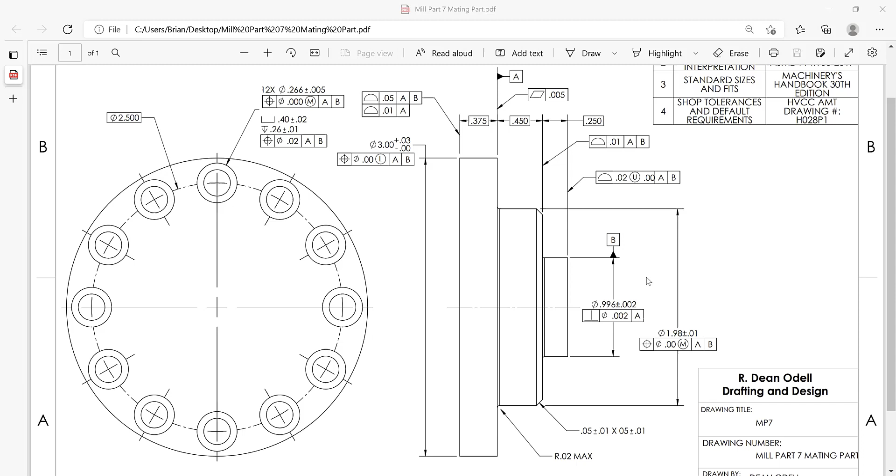Alright, this is the part we're going to be working on for this module. So we're going to do the turning on this side in this op. We're going to flip it. We would bore soft jaws at the machine. We won't program that in Mastercam.

We can do G71, or we can use one of the Haas quick codes to do that. So we'll leave that alone, but we would grab it with soft jaws on this diameter, flip it, and then we'll face the remaining stock, and then we'll use the live tooling to drill and circle mill these holes out. So that's the process plan for this one.

So let's get started. Alright, so let's import this model. So I'm just going to go to open here and go to my desktop. I already have it downloaded. I'm looking for step files. Make sure if it's not there, you're looking for the right file type. So there it is. Hit open. And there's our workpiece. So notice it's not aligned to the top plane correctly.

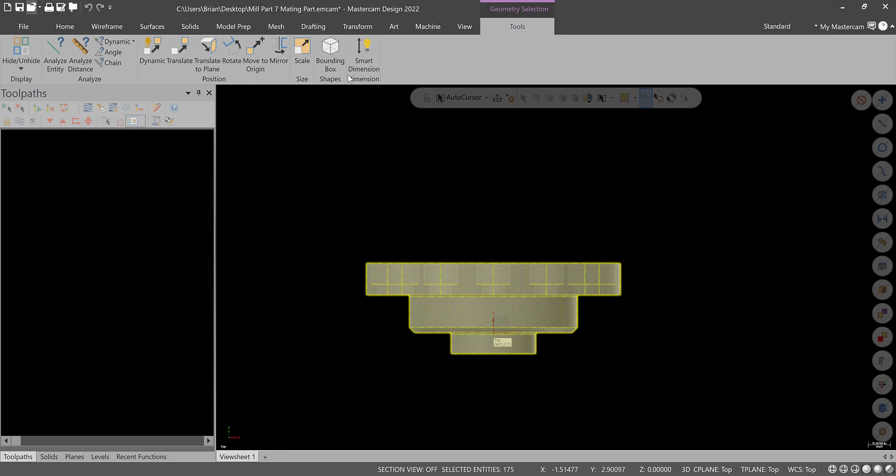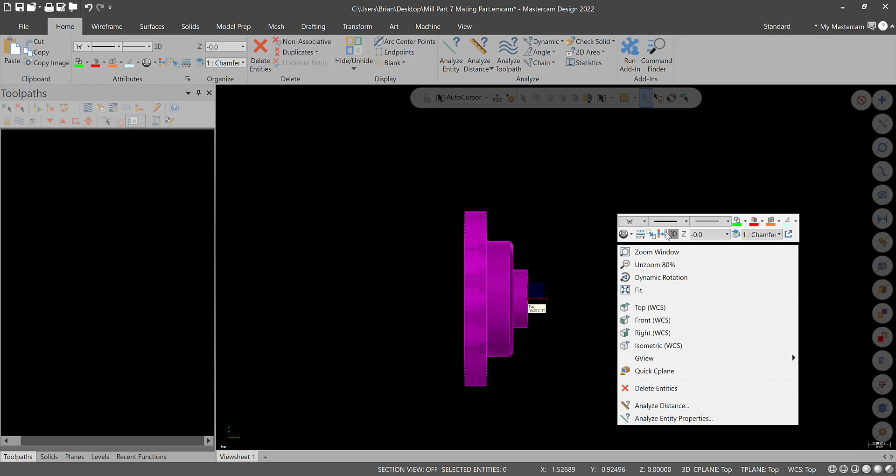Okay, so we go to top view, it's not right. We need to translate it. We could have done that in the initial open screen, but I find it just as easy to just move it here. So select everything, dynamic, and I'm going to select the diameter here, rotate the workpiece -90 or 90, like that, and then select the center of the dynamic gnomon and bring it to the top plane. So then if we go green check and top view, it is aligned properly to the coordinate system of top.

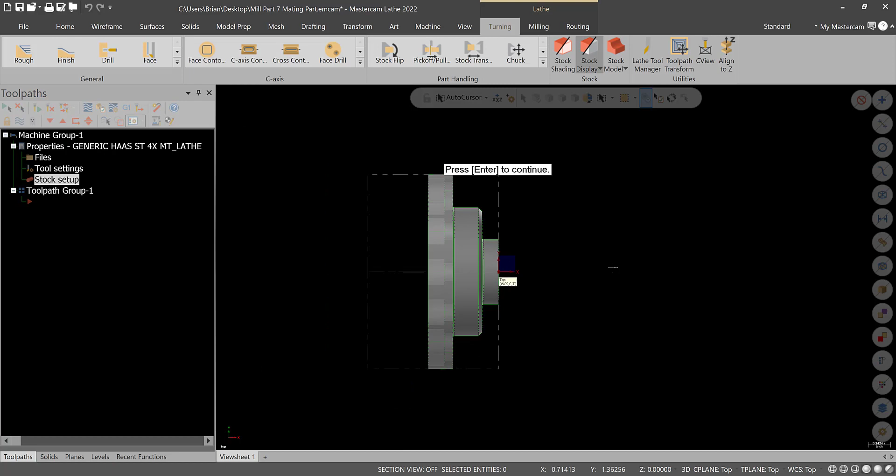So we're good there. Let's go to a new machine, machine, lathe, the generic Haas ST, and let's define our stock. So we'll go into our stock settings. We're going to be using 3-inch stock for this, probably, let's say 2-inch for workpiece for now. Let's preview lathe boundaries. That'll work for us. Then beyond that, we're good here. In the chuck jaws, we'll go parameters here from stock, grip length, let's say 1 inch, and let's see where that gets us. Alright, a little less than that we'll need, so let's go 0.5.

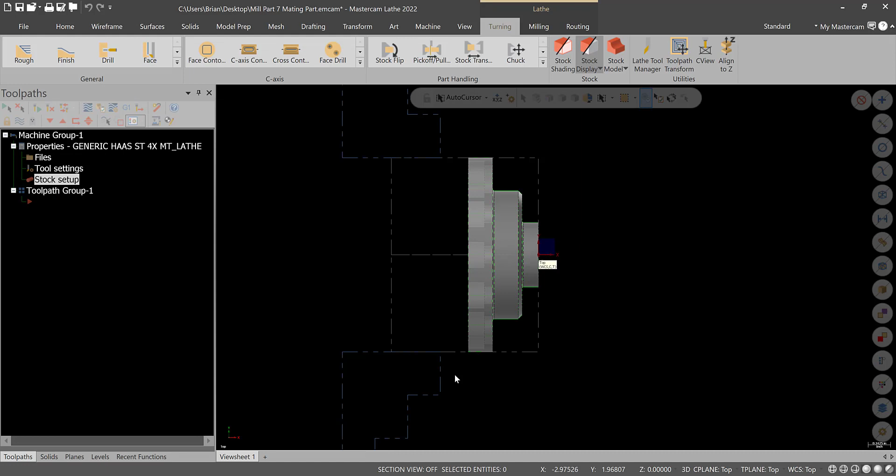So that looks good. One thing I might change, we are going to go right to the edge here. I might actually extend the stock. So if we go to stock, let's make this length 2.25. And then if we go to chuck jaws, we can change the grip length to something like 0.75. And that's better. I'm happy with that. I think it's a safer setup. Okay, I know it's kind of a lot of stock. We do have some stock here that we're going to have to take care of later. There are other ways to do this, but I think this is the quickest operation for us.

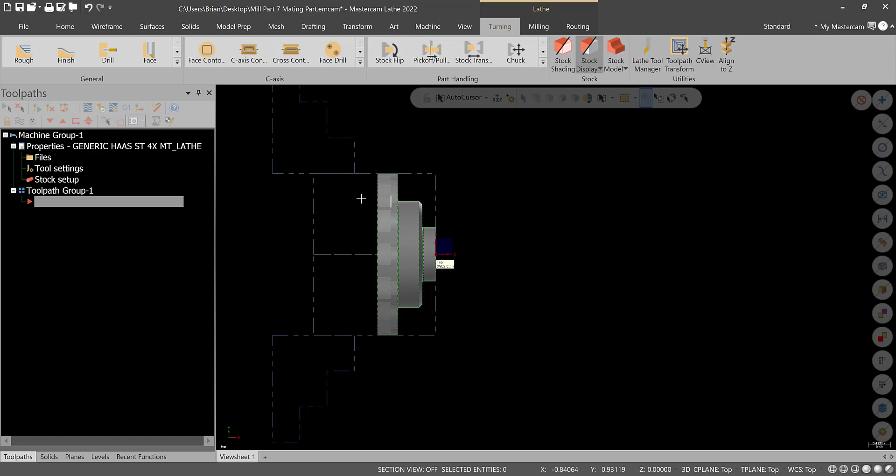We're not going to part this off. We could actually grab closer, but I want to keep students away from the chuck jaws. I'd rather leave clearance here and not hit the jaws than hit the jaws and try to save a little bit of stock. So that's my theory there. In reality, if we're making these parts for profit at a machine shop, we would leave less material, in my opinion. So toolpath group 1, we'll just call this turning op, or just op 1 for now. And let's face this workpiece.

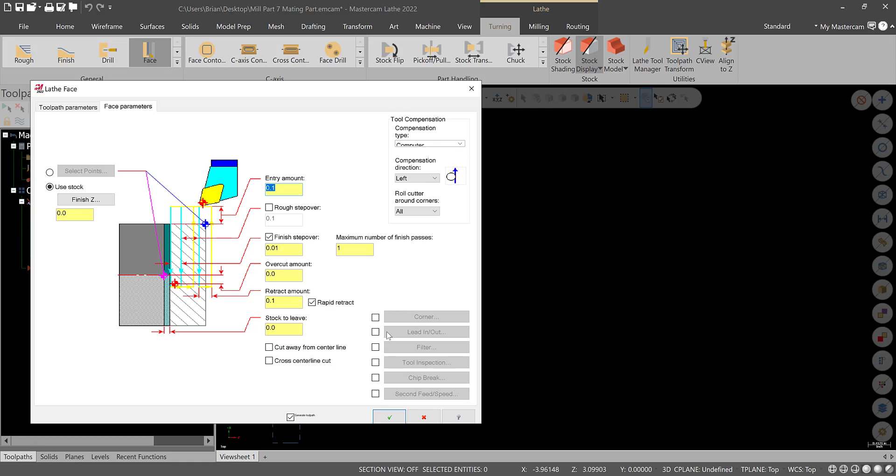Good time to save. I'm just going to save this on my desktop as live tooling example. And then I'll transition here, allow you to catch up, and we'll go back and we'll turn this, and we might turn this with a little different method than we have in the past.

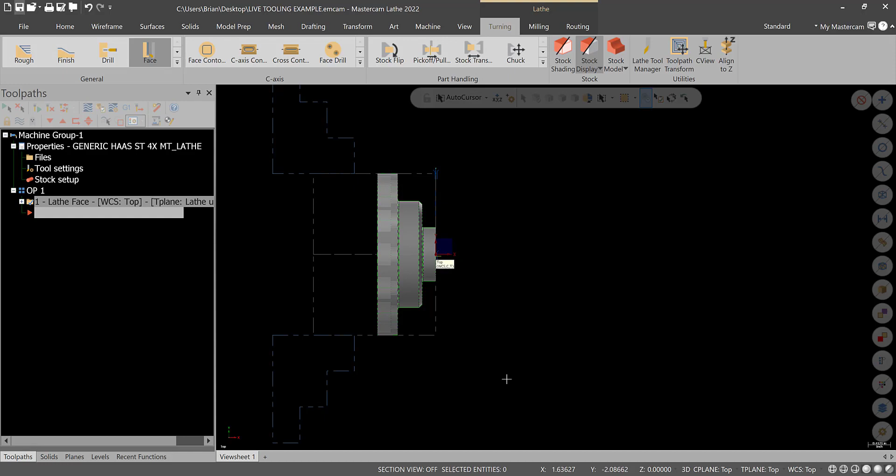Alright, so let's take care of deburring this part first. We have a couple of sharp corners I want to take care of. And like I had done in previous modules, I'm just going to go into solids and constant fillet. We'll select that corner and that corner. And the radius will be 15 thousandths for us. That's usually pretty good. Green check. So now we have those filleted.

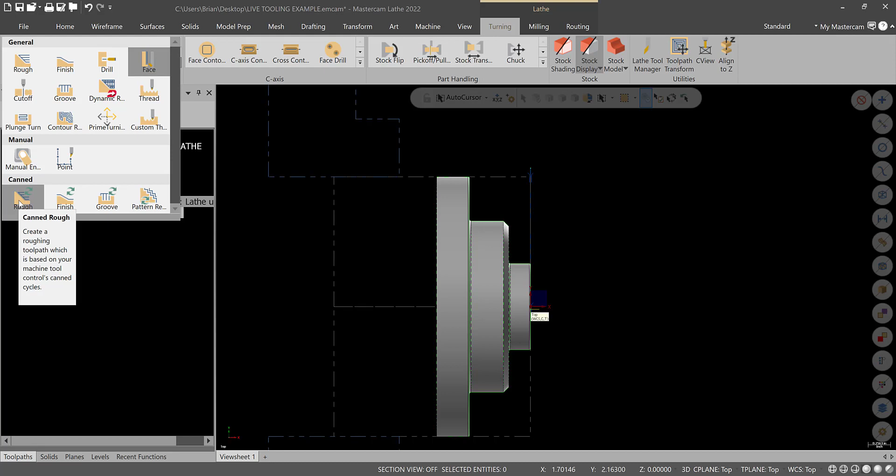So now we can get ready to turn this. So just to do something a little different, we'll go to turning, and instead of doing the regular rough or finish, we'll actually post this out in canned cycles. So let's do a canned roughing cycle. This would be outputting G71. So we'll go to canned cycle.

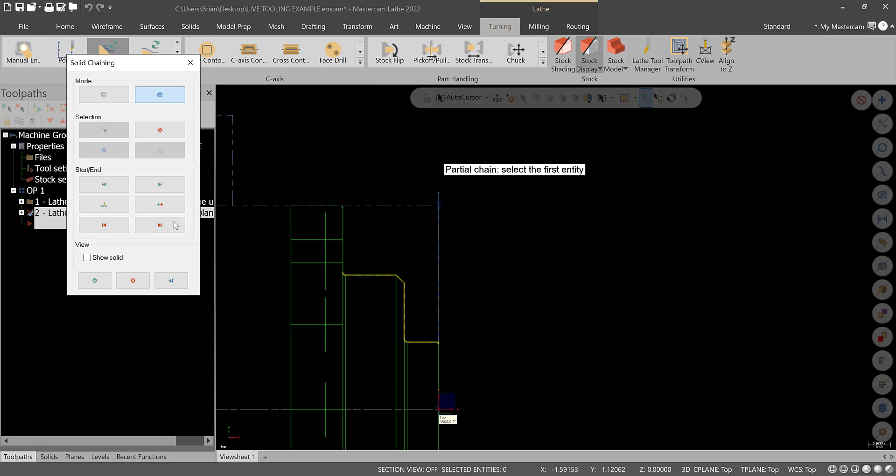We'll select the radius, the fillet here, change direction, and then select the end here, and it should select. If it does not, I'll usually just get out of here, go back to this one, and guide it with the arrows, just like that, and we'll hit green check. Use the same tool that we faced with. Same speeds and feeds will be okay. Again, it's reduced, but it's fine.

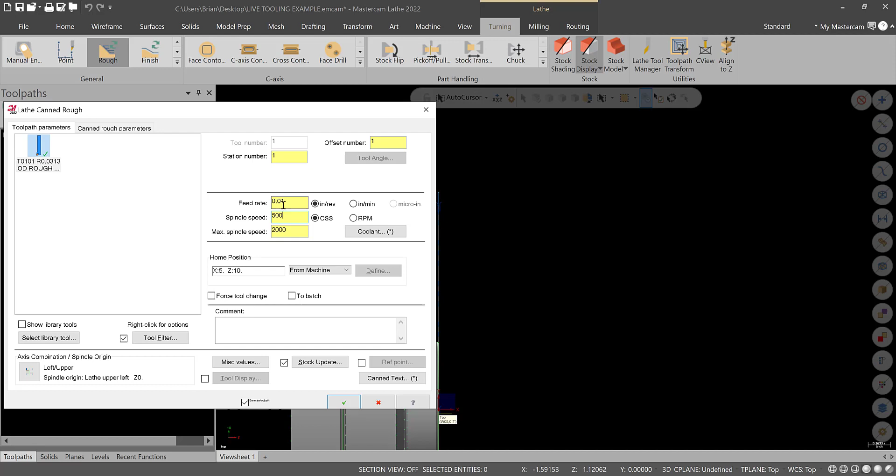I'm not sure how much experience people are going to have running this. From a programming standpoint, it's sort of irrelevant. If you're just programming, you're not going to be running this in the shop. But I'd rather be a little conservative with speeds and feeds for people running in an educational environment. So canned rough settings, stock to leave in Z and X 10 thou is fine. Depth of cut will go 0.050.

Everything else looks okay. The only thing I want to change is going to be lead in, lead out. I want to extend the lead out a little bit, let's say 0.030, just to make sure that it cleans up later. Shouldn't make a huge difference. We will radius out. I just don't want to leave any radius there or anything like that. So that's good. Everything here looks okay, but notice it prompts us for a 2-line format.

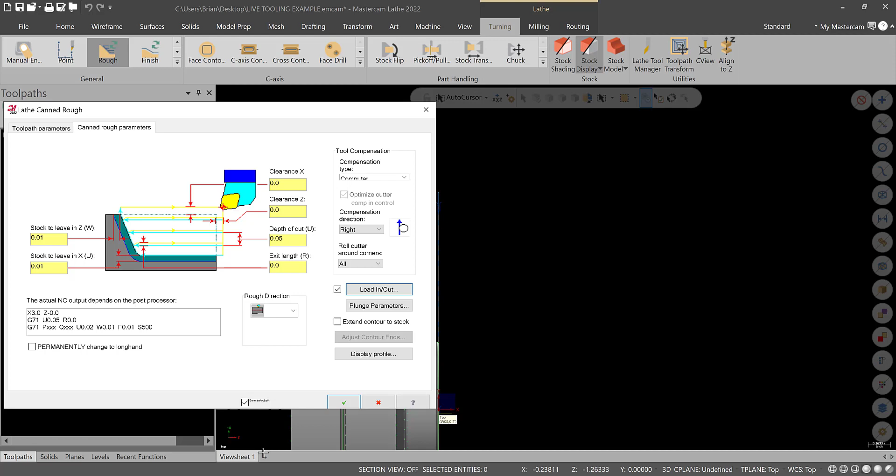G71. The Haas is probably going to output a 1. I gotta remember that, but anyway, that's what's gonna happen. You could change it to longhand, but this is the output G71, which is great if somebody's gonna be changing this program later on. It's just another way to do it. So hit OK. There's our roughing cycle, so we could actually watch both of these right now in backplot. So here's our facing.

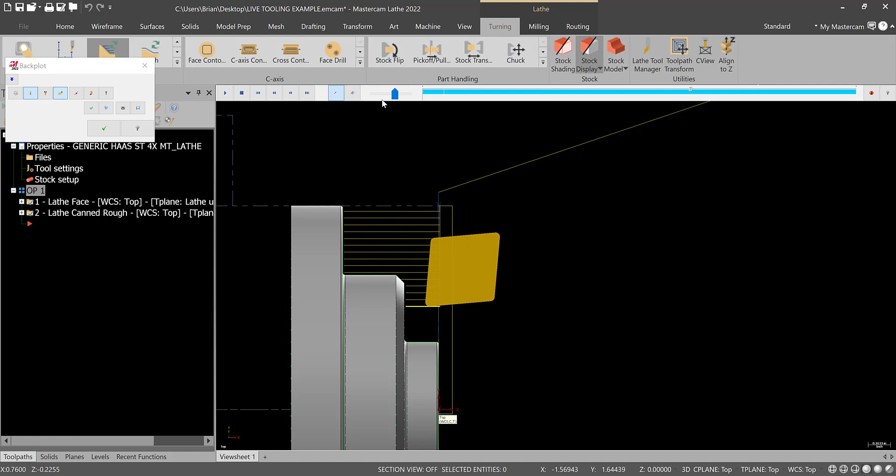Okay. Now, in theory, we could have left no material and that would have finished the workpiece, but we'll do a finish just to have the G70 be put in our code. The other thing I want to bring up is that I know that the part is 3 inches and does have a plus tolerance on it, but the stock we're going to use for this in the shop is 3 inch, so I will either change the tolerance of that or we'll just live with it.

I don't want to end up going to 3 1/4 or 3 1/8 because 3 inches is the standard stock size we have at the college, so that's what we're going to live with for this. That's why it is the way it is. So there's a roughing pass. Okay, so let's just take a look at this right now. We'll post this canned rough alone just to make it simple to look at.

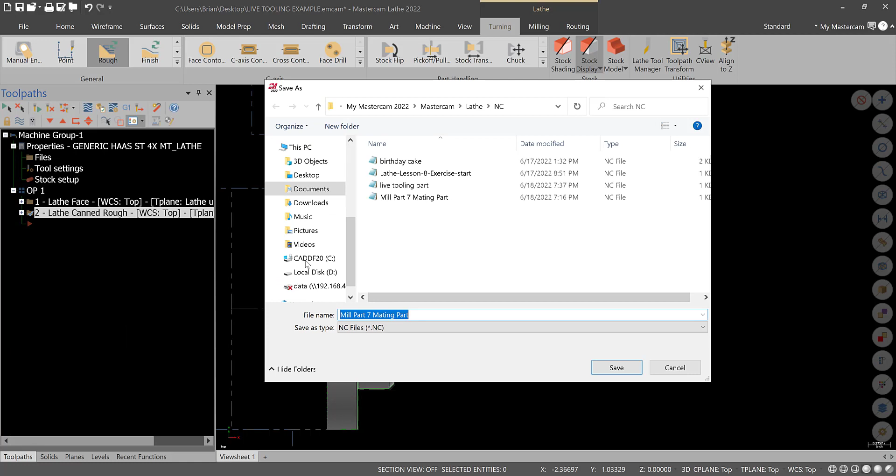And you will see your 2-line G71. P100, and it posts it right out like you have done in the past doing this longhand. So that's another way to output the code. It's shorter, it's easier to edit, but for right now, I'll transition here. We'll take care of the finishing passes. Alright, so back into Mastercam here. Let's just do a finish operation.

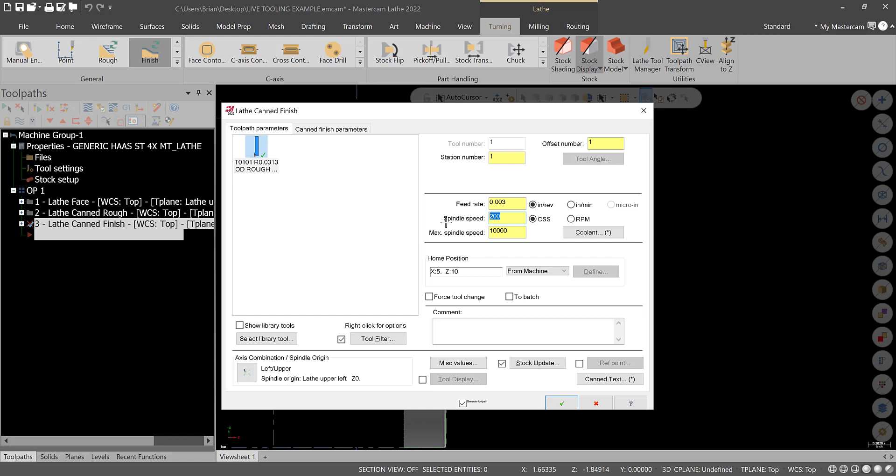Now the nice thing about canned finish is that there's no chain selection, so I'll turn the visualization of the roughing off. Let's go to finish, and notice the same tool popped up. We'll rough and finish with the same cutter. Let's update the speeds and feeds a little bit. And then look at the parameters, nothing much here. So let's hit green check, and this is going to look okay.

We'll look at the code, but then we're going to have to come back and fix it in a minute, and I'll show you why this is here. So hit green check. And notice this leads in right here, and if you look, it's leaving a little bit of stock. So that's okay. If we verify this, it is not the end of the world, but because the initial pass,

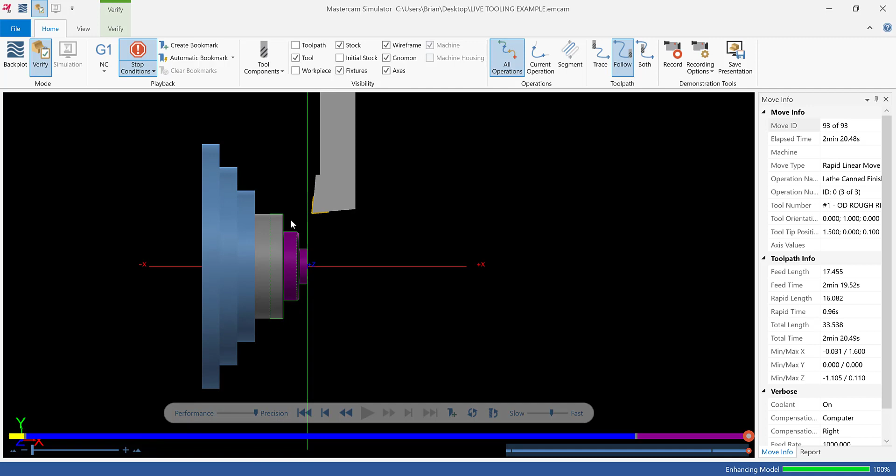there it is, there's a finish. So you see, it's not quite cleaning up the radius how we want it to, versus this radius. But what I want to show you, and again, that could be okay, it's only deburring. It depends on what you want, and there are other ways around that, but let's take a look at these two operations in code, just to show you this.

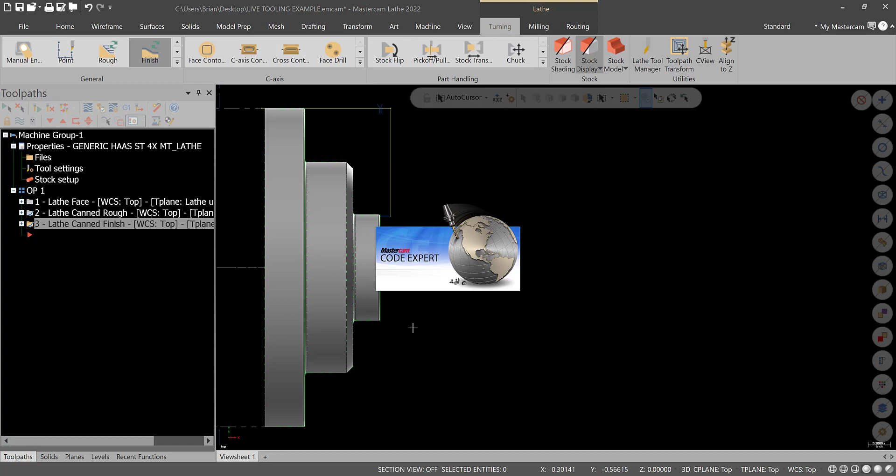Alright, there's our G71, our lines of code for it. Okay, all the way to 110. Z1.0, then go to G70, which will loop back to here, and there's your feed rate changes for the finish pass in here. Alright, and that's it. So there's G70, G71.

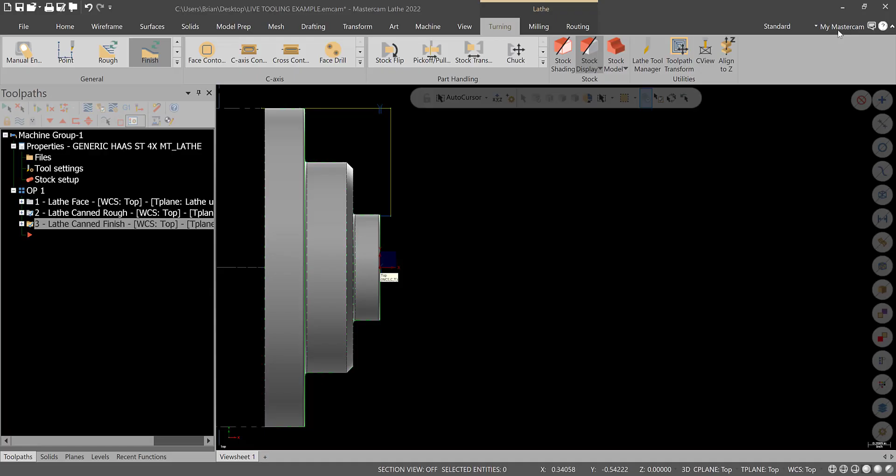Now, there are some options here, but I want to show you what would happen, why that permanently changes there. Notice, this is a problem, let's say. We don't want this. The canned parameters in the rough won't allow that for whatever reason. If you click this, and this is why it's here, click this and hit green check, it goes into a regular finish toolpath, and now look where it is.

Okay, notice it verifies right. It turns it into a standard finish toolpath, not G70, without having to go back and rechain it, which is kind of handy. It's also in the roughing, so if for whatever reason you don't like it, you can go back and not have to reselect. It's sort of handy.

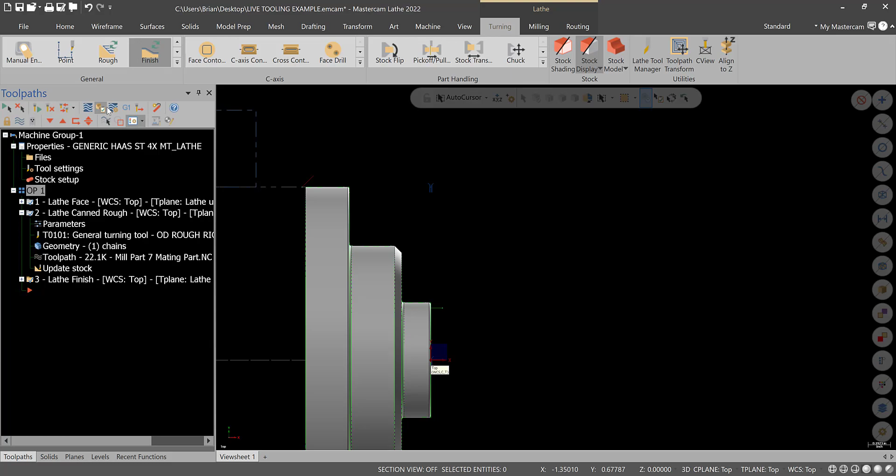So now if we select both of these and post the code, and actually before I do that, let's verify everything just to show you the difference. Face, rough turn, canned, and then finish turn, and notice it's a full radius. Okay, so we're good there. Let's post only the OD work. Take a look at the code differences.

Alright, so we got our G71 going through, right through line 110, changes, and there's our longhand finishing, right there. Okay? So it's a little different. You know, it works good. Let's double check our G50, S2000, that's good. The only thing that I'm not a fan of is the G97 right there. That should turn the spindle to S2000.

It's not the end of the world, but it could speed up or slow down depending on where we're at and what the constant surface speed works out to. But I'm cool with this. Being that it's one tool, the G50 is a limiter, we're good to go. We'll live with it. But yeah, so that's essentially what happens with that.

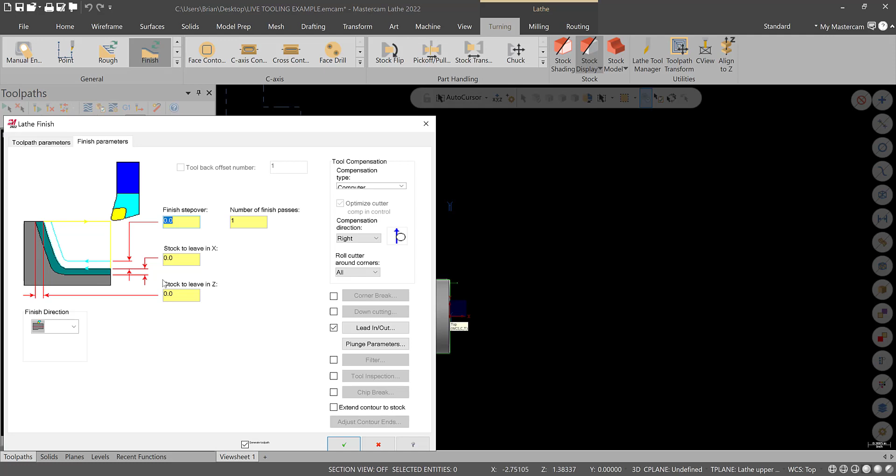Either the rough or finishing canned cycles permanently change. It's permanent. You're into a finish pass with all of your control that you normally would have. So that's our example for that. So hit save. And this part is roughed and finished, so I will, again, save, transition, and we'll come back to a stock flip and get into the second operation.

Alright, so let's get ready for our stock flip. Let's get our view sheet set up here. So I'm just going to save view sheet bookmark and rename this as op1. And then we'll get into our levels, and this will be part op1. And then in toolpaths, we'll do a new toolpath group, and it's going to be stock flip. Alright, let's select stock flip.

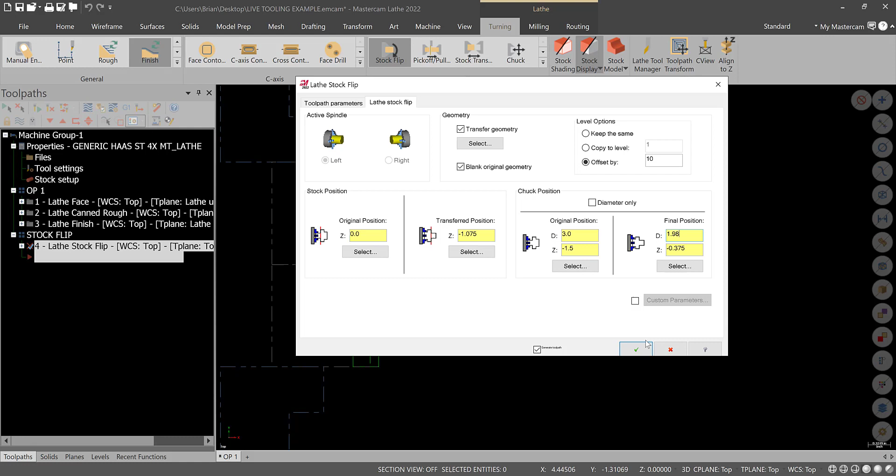We're going to select all this geometry. And then the transferred position, we'll start using the select icons, is going to be to there. And then the final position is going to be here. The diameter is 1.980. Hit green check. And that is our next op. These jaws would be soft jaws.

If you're in lab, you're going to have to bore these first, and you have two options. You can write a little G71 code to do this. You could use the Haas quick code in the machine, which is fine. You could also write a little macro, and depending on where you are in the curriculum, we could work on that with variables. It's up to you. You could even do it in Mastercam, but I think in mid-process it's kind of a waste.

I typically either use G71. I have a file that I saved, that I use over and over again. Or I use the quick code, depending on what brand of machine I'm running. On the Haas, the quick code's pretty decent for stuff like that. So that's what I would use. The jaws would not be stepped, they would be flat, but we're going to stay away from it anyway, so there's no sense in getting that kind of accurate in our verification.

Just know that you can't go past this boundary, and we should not. The only thing that I'm worried about is when we go to drill these holes, I don't want to hit the jaws. So if we go to stock flip, and the transfer position 1.075, the Z is minus 375. Let's change that and let's go to 350 and let's just see which direction it goes.

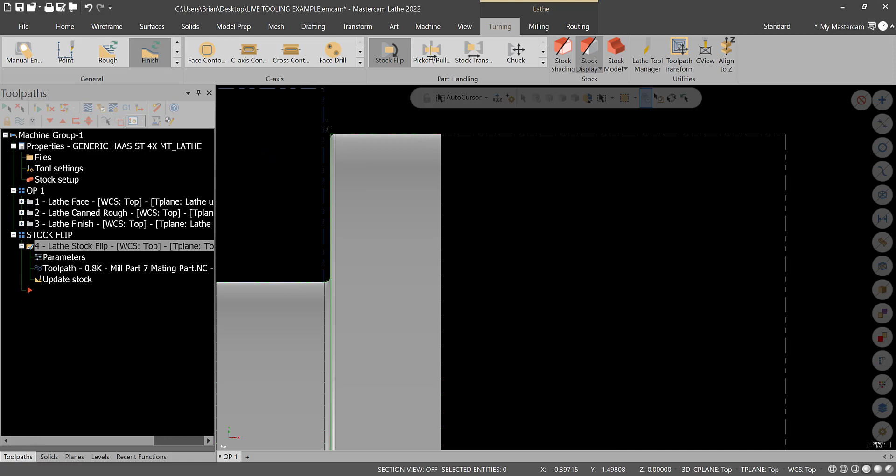Wrong way, so it's going to be, let's go 0.4, and that leaves us a gap. Okay, now that gap still may not be enough. So notice again, it depends on where the holes lay. One of them's going to hit the jaws. There's so many holes there. We can add it. We can go a little bit more, 425.

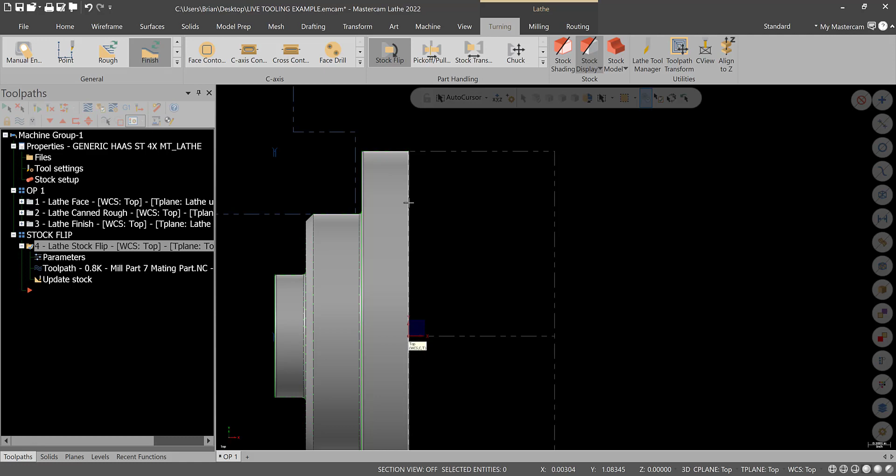All right, and we'll just have to keep an eye on it. It depends on if we're going to end up using a drill or an end mill, and what the angle is. We might have to change that. So let's just leave that for now. And actually, I am going to tweak that a little more. I lied. So let's just go 450.

So that's good, okay? And then you'd have to make sure you space that at the machine before you run it, okay? And again, it's not the end of the world if you went to 375, if you're okay with drilling into the jaws occasionally. As long as we're far enough away from the corner, it shouldn't matter.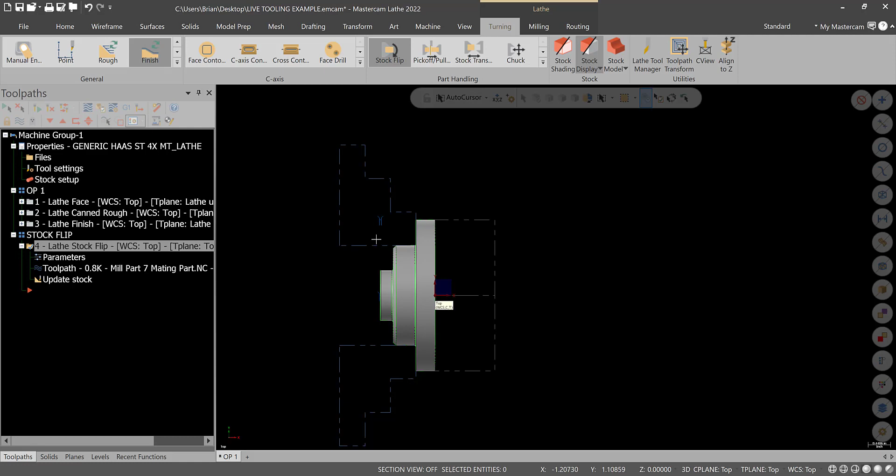The other variable is, if you want to do that, I recommend facing the jaws, then boring them. You want to make sure you leave... this would be a sharp corner in the jaws. You would have to make sure that you chamfer the jaws. Now, that's a much more rigid setup, and if you're in lab class, I definitely recommend doing this. But make sure you talk to me about setting up the jaws and how to cut the jaws.

And we're going to leave it in this for programming. But make sure that you talk to me before you run the jaws or create the jaws, because there's variables you got to think of. If you want to run this rigid setup, one, you got to be good with drilling into the jaws. Two, you got to prep this corner to make sure it doesn't rock on the corner.

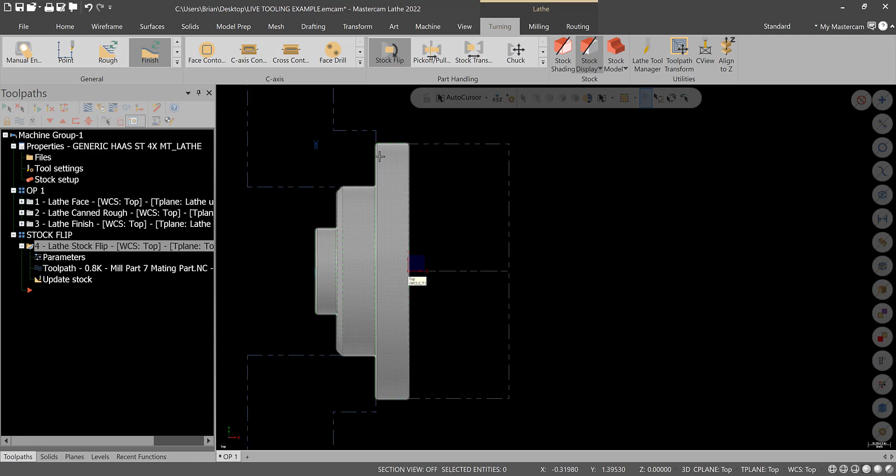And three, you got to make sure you face it so that the bore and the face of the jaws are square, so that you're getting double contact, face contact and diameter contact on the part, which is a rigid setup. You just got to prep for it. So we'll leave it there for now. Facing to zero is not a big deal.

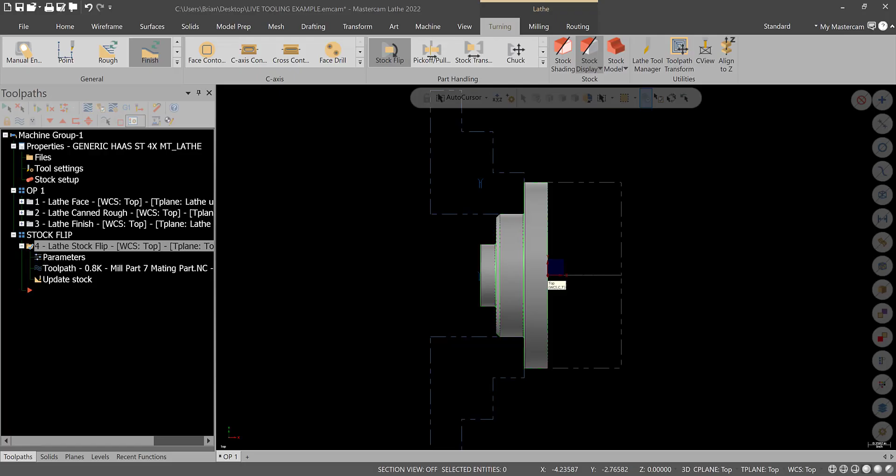What I typically would do, if you are pushing the part to the jaws, you could touch a tool to the jaws, come back the thickness of this flange, which happens to be 3/8, and then set your zero that way, your G54. Or you could face this and measure. There's a lot of different ways to find zero here.

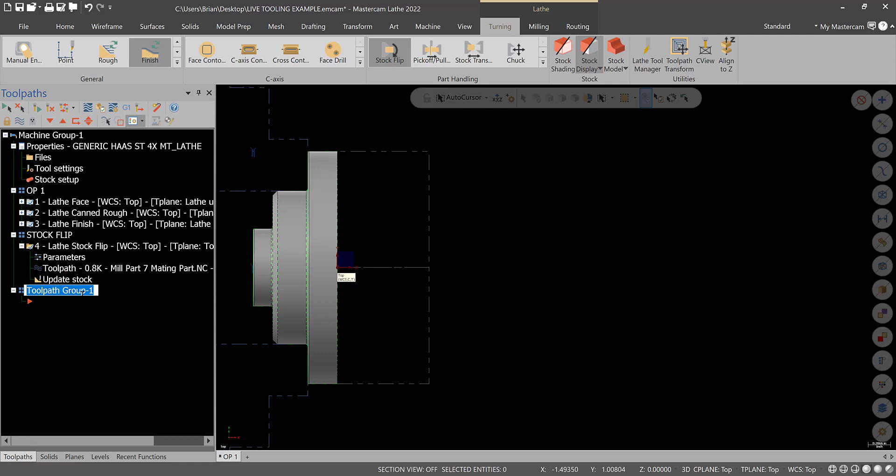Again, talk to me in the shop, and we can address that at that point. But I need to know your process plan if you're in lab and manufacturing this. For programming, this is what we're doing. So that's good for now. All right, we'll do a new toolpath group. I'm going to rename that. This is op2. And we'll do a new view sheet, op2, and save view sheet bookmarks.

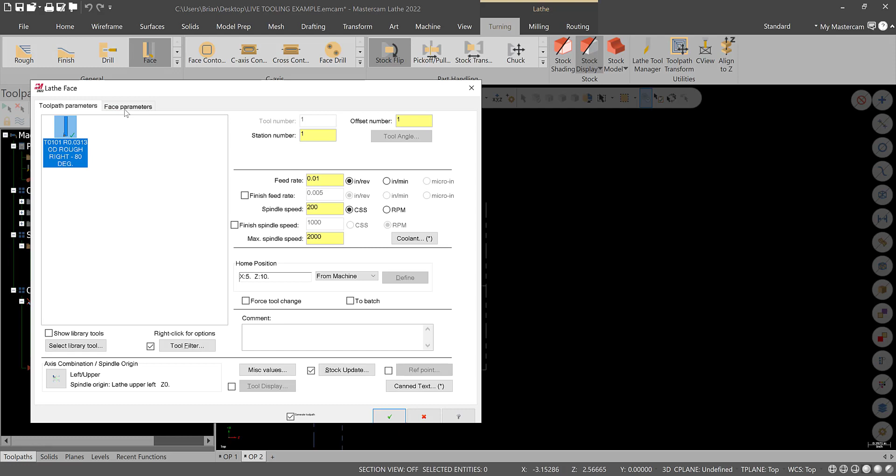We'll hit save. And I'll transition here and let you catch up, and then we'll come back and face this and do some live turning. All right, let's get ready to face this material off this workpiece. So we'll go to face. Select the same T101, face parameters, use stock. Let's just hit green check.

All right, we have a problem. The stock has been repositioned. Between two tool paths, use the same tool. The tool is not necessarily retracted to the same start point. You have options. Either go to safe reference point or select force tool change. Let's do force tool change, and what that does is it forces a tool change op to occur as if it was going to change tools.

So just select force tool change, and this is kind of handy on mill too. If you got the same tool doing multiple ops and you wanted to go home for an M01 in between each op instead of putting M00s in, force tool change will do that. So it's green check, and notice it works.

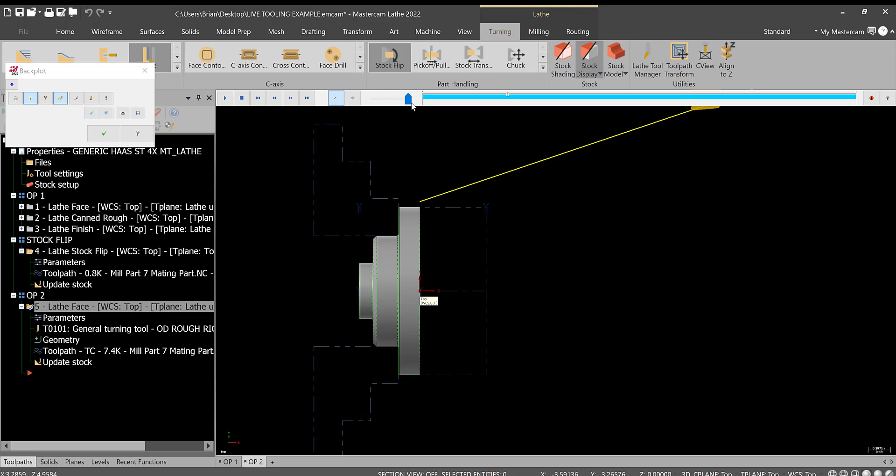Now the only problem is if we watch this, it's trying to take it all in one shot, which is obviously not going to work. So we need to go into face parameters, and then as far as the roughing, let's take 50 thousandths a rip and finish step over. We'll just leave it there, or turn it off. I'm sorry. We'll go 50 thousandths rough step over, hit green check, and notice it roughs.

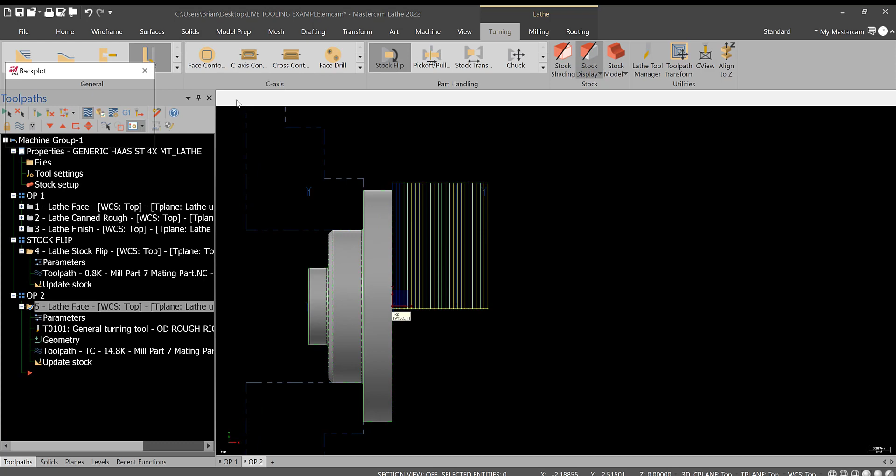All right, we're going past zero. That's good. So we could have done a canned cycle. Notice there, there should be... I guess I lied. Canned rough. You would just have to change the... I'm not going to change that. But if I show you up in this one, the rough direction would change it to a facing program, just like you would for boring or whatever you're doing.

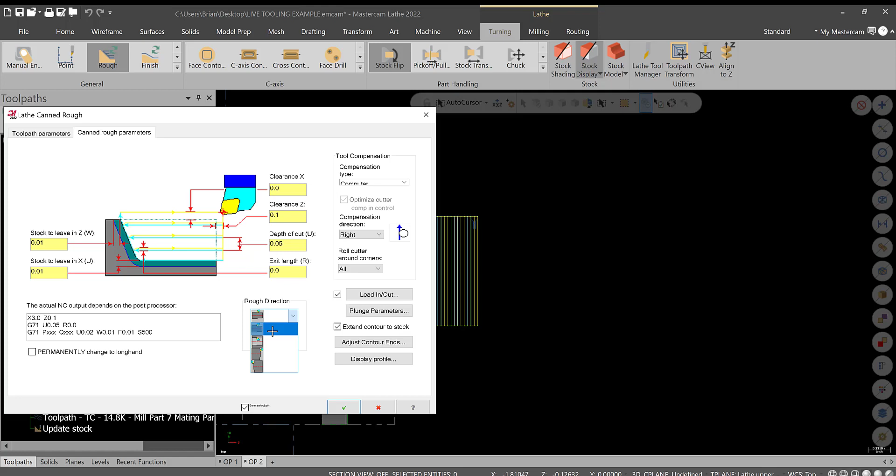Okay. So we'll get out of here. Minimize op1. Go back to op2, and make sure that we bring our cursor with us so that the stock flip and the orientation goes with us, just like we did before. That red cursor again pretty much processes the workpiece. So we'll turn this off.

So now we're faced. One thing I want to do in that facing op is deburr this edge. So we'll go back into parameters and go to corner and change that to 15 thousandths and hit green check. Now it's going to do that for each op or each slice of this, but it's not a big deal. You're not gaining, you're not losing that much. Okay, so we're good there.

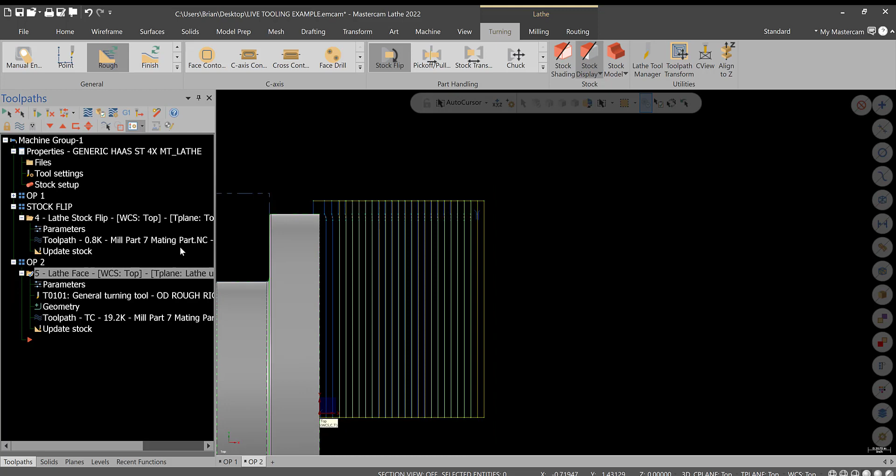Okay, so let's get ready to do the live turning. And again, don't worry about this OD. I'll either reduce that in the drawing or we'll update that. I'm not really worried about it. It's just that we use 3-inch stock at the college. We order it in bulk, and that's what we're using for this project. This is a mating part for mill part 7, if you didn't already look at the file name, so that's why it is a 3-inch OD.

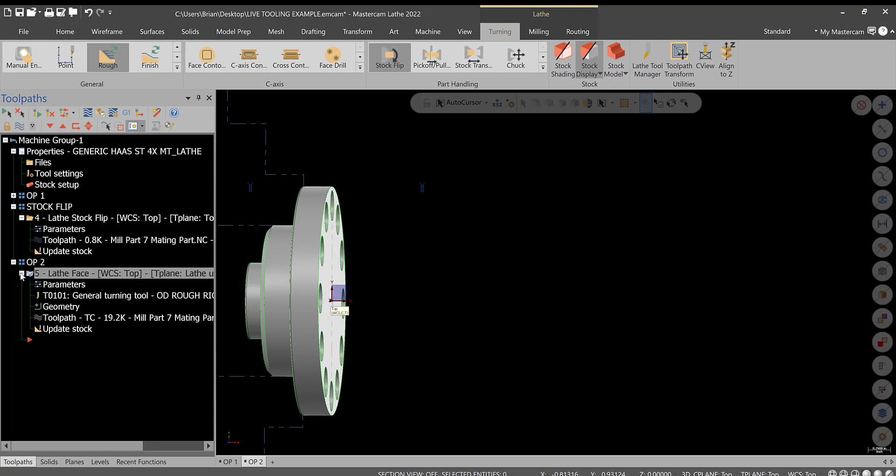So we'll minimize this lathe face. And now, for the first time, we're going to be into the C-axis command. So I'll transition here, and we'll get into some axial toolpaths. Okay, so let's do some drilling on the live tooling lathe. So we'll go to face drill.

Okay, then what I want to do is I'm going to select these holes. Now I'm just going to go through and select them. There's not that many, and I like the control of it. If I have a ton of holes to do, you can do mask on arc and these other things, but I think for simple things like this, it's easier to just control it.

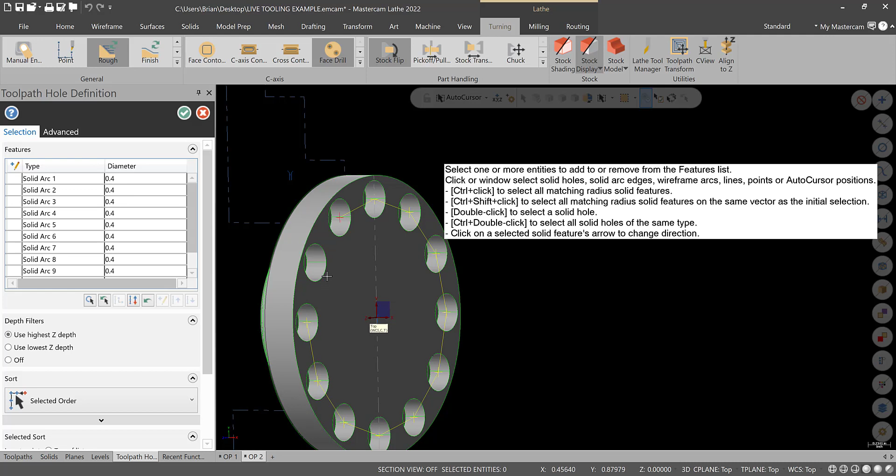Okay, green check. So the tool we're going to use is a spot drill. So we'll go to filter, and we'll go to spot drill. 3/8 is fine for this. That hole size I think is .266, so 3/8 would work. 3/8 spot drill is fine. Green check.

Make sure that this is going to be the right tool. We have to sync it up. There's only certain tools on the machine that are live. So we're going to end up going, let's say, tool... I don't know, tool 8, let's say. I don't remember off the top of my head on the ST15 that we have what tool that is, so you might have to change that.

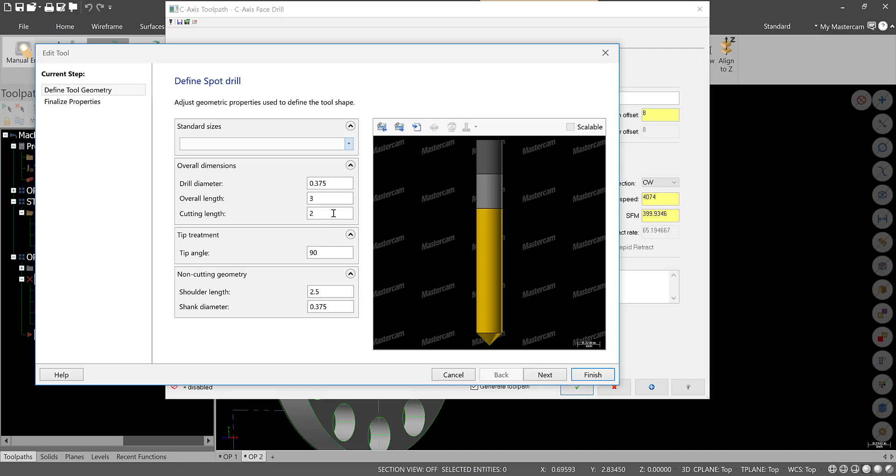This is aluminum, so these speeds and feeds are okay. This should have 2 flutes, and the other thing we've got to change is the tip angle at 118. And it says 4 flutes, we're going to go to 1 to finish. So the updates will reduce that feed rate even further. Again, we're going to go nice and easy, being the first time you're running a live tool. 4,000, we'll go 2,000. Just nice and easy.

I forget what the limits are on the ST off the top of my head, so we might have to mess with that, but 2,000, we could even go 500. Because this might be thinking... let's see what it thinks. No, we're good. We'll go 500, nice and easy. Again, these are not optimal in any way, but for the first time running live tooling, I don't want to break anything. In this shop, there's only one live tooling machine. If it gets broken, we're down.

That's it. So we'll go cut parameters, drill counterbore, linking parameters. We'll go incremental from the top of stock for these two. Incremental top of stock is 0.

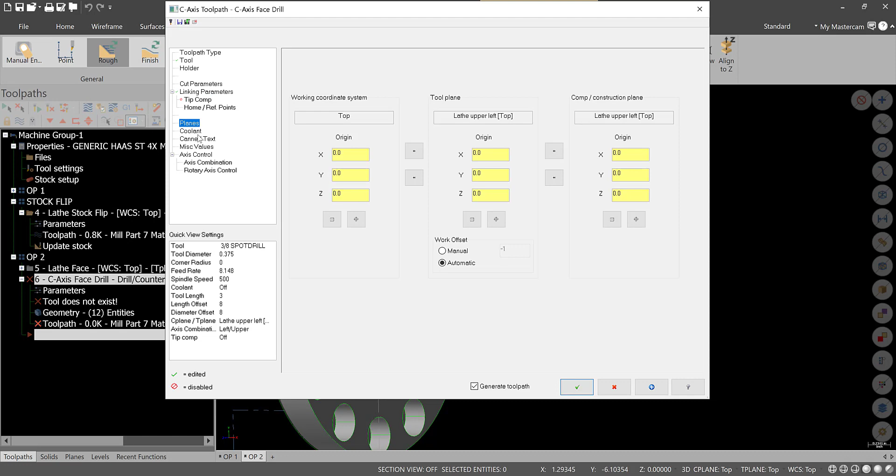That's where we selected. That's good from chain geometry for these two. We'll do a finished diameter of 0.275 and overwrite the depth so that we get a little bit of a chamfer. Tip comp we don't need. Planes is fine. Coolant can be on. That's up to you if you want to be able to see or not.

Down on the bottom, we have different controls for what kind of motion we want. Do you want the Y-axis to move around the workpiece, the X and Y, or do you want the C-axis to work? We'll select the C-axis so that the X and Y, or the X, depending on what it needs, will move. It's mostly going to be the X, and the C-axis, the chuck, will rotate. So we'll leave it there, and we can post that differently. That's up to you. We'll hit green check here.

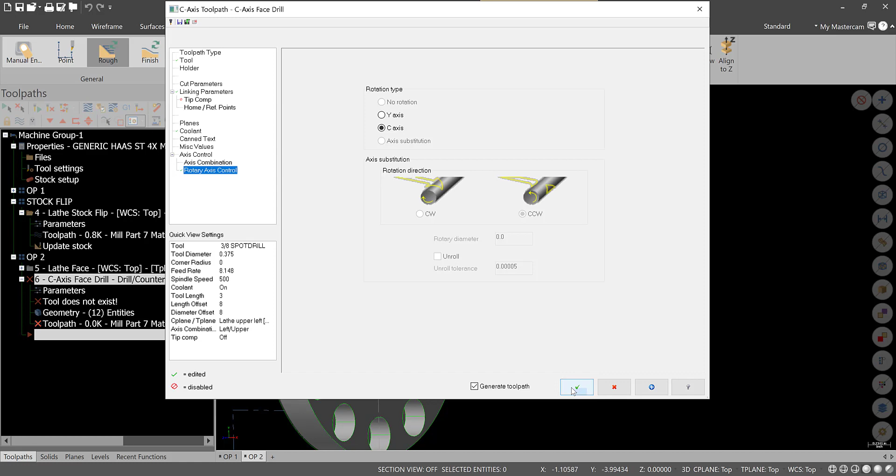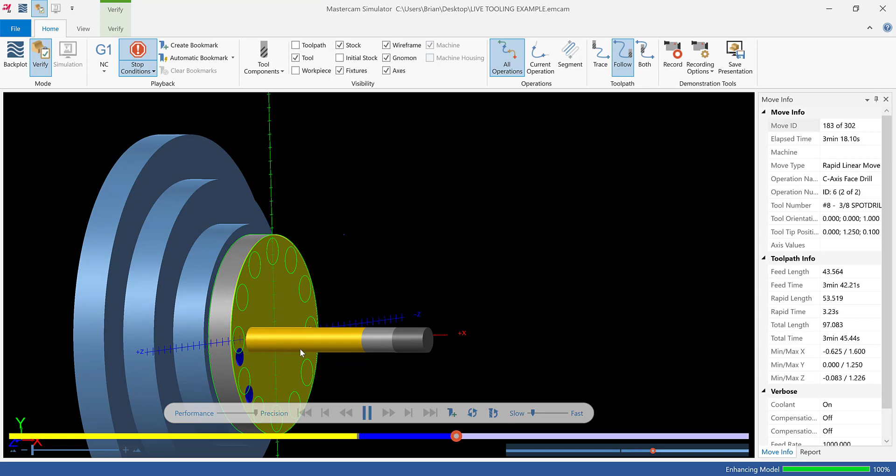There's our op. So now we can actually watch this in backplot, spot drilling on the lathe. I'll actually watch that and verify quickly both operations. So it faces, slow way down, and then watch as it spot drills and rotates the C. Notice the tool's not moving, only the C axis is moving.

Okay, so now one of the keys here is that if we go into here and post the code, you will see C-axis moving. You also see some other commands in here. And again, you gotta watch this because you might have to change the direction of the live tooling, things like that. Different M codes, your different RPM values. P is 500 RPM. Should be clockwise M133 if I remember correctly.

Get into the rotations, move to Z quarter inch, C 30 degrees, X 2.5. Should be unlock the C axis, if I remember correctly. Then it gets into G81 and then all your C locations. Okay? Then it continues on.

Now, let's take a look at this with the other option for the rotation. So if we go to Y-axis, because our lathe does have a Y-axis. If we post the code, it's going to be a little bit different. Notice that it looks very similar, except for the fact that there are X and Y moves. Okay? So you get the idea there.

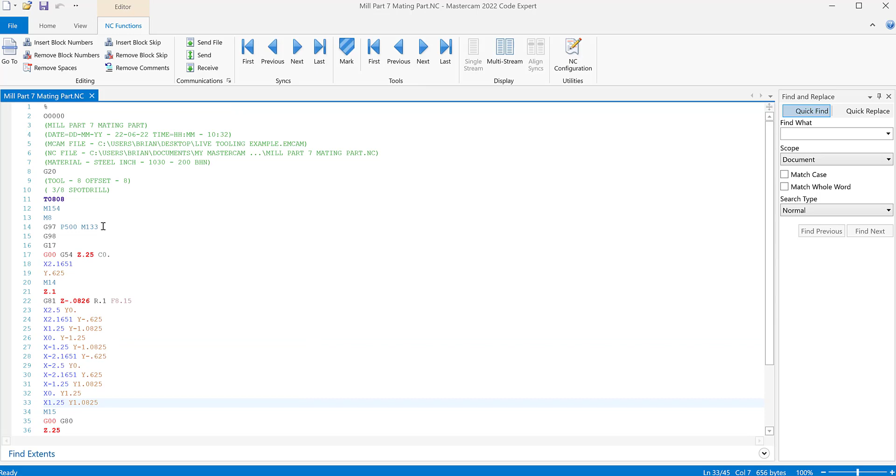Alright, it's a little bit different. Spindle on's a little bit different, things like that. But for the most part, that checkbox does drastically change the program, but we'll leave it on C axis. I think it's a little bit cleaner of a program. The Y axis, I forget how much travel, it's not much. So we'll go with the C for something like this. All right. So there is the spot drilling operation. I'll transition here. We'll come back and drill the holes, and then we'll actually mill the counterbores.

All right, so let's go ahead and copy and paste that operation. And we'll get in here, and actually I'll rename this just to stay organized. It'll be drill. And this one will be spot drill. Okay. So now we get into here, and let's change our tool. And this is going to be tool 8, 9, probably 10. But again, double check at the machine.

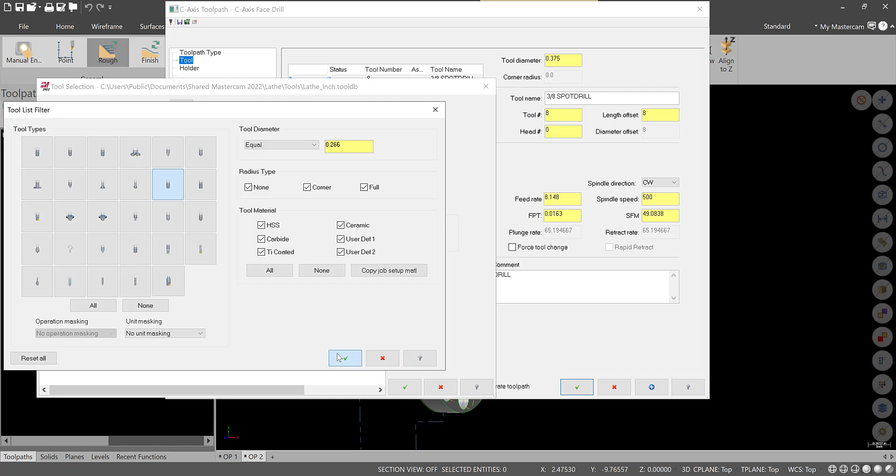I don't want to do that. Let's do another tool here. I'll change it in a minute. I'm just going to find the tool first. So we'll go 0.266. I'm not sure off the top of my head. Letter H drill. Perfect. Green check. Let's change this to tool 10. And then 500 RPM at that chip load's fine. I will double check and make sure it's only one flute to get that conversion to IPR.

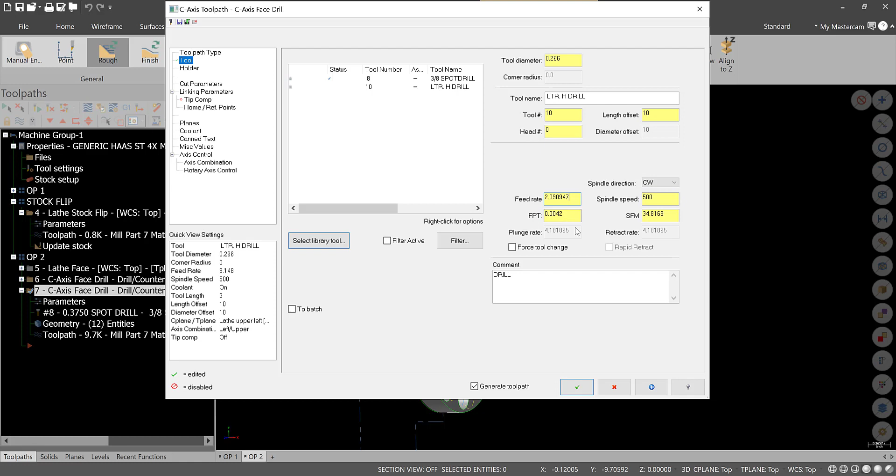That's good. Actually, reinitialize speeds and feeds. That's good. 500's better. So we're good there. All right, that'll be fine for us. Again, not optimal. All right. Cut parameters. We'll go to peck drill. First peck 0.1. That's fine. Actually, we can just go 0.05. Get a little more motion.

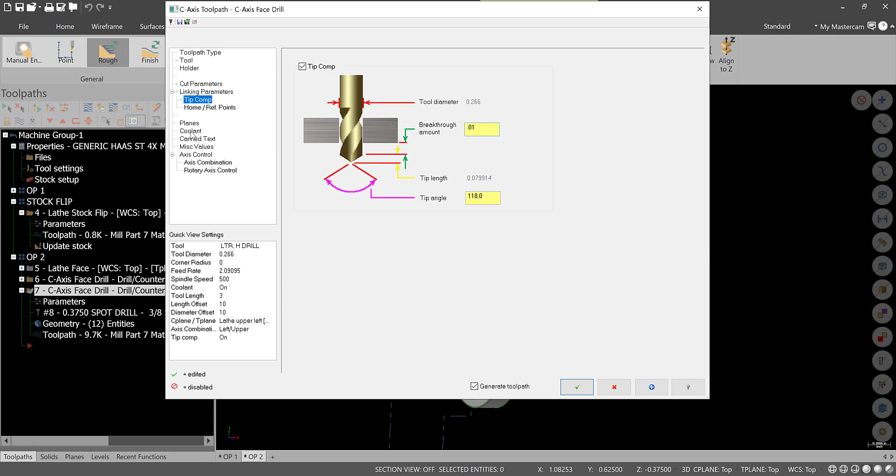Depth is going to be all the way through, and we'll put tip comp on and break through 10 thousandths. Coolant will be on. Axis control C axis, just like the other op. Green check. Looks good. So let's watch this operation and verify. Good time to save. Let's watch the drilling ops.

So the facing, the spot drilling, and the drilling. Now, collision occurred. Yes, it hit the chuck jaws. We know this. So what I'm going to do is go to stop conditions and just turn that off for this one. Okay, that's the way we're programming. If you want to put the space in to allow this, that's fine.

But sometimes it is okay to hit your fixturing. We're only hitting it by the drill tip to get a good part. We're not plowing through the workpiece. We're not hitting too much. And actually, we'll take a look at that now. If we get out of here and go to the front view and turn these off, turn this one on, and then make sure we're on top view. I went to front accidentally, so there we go.

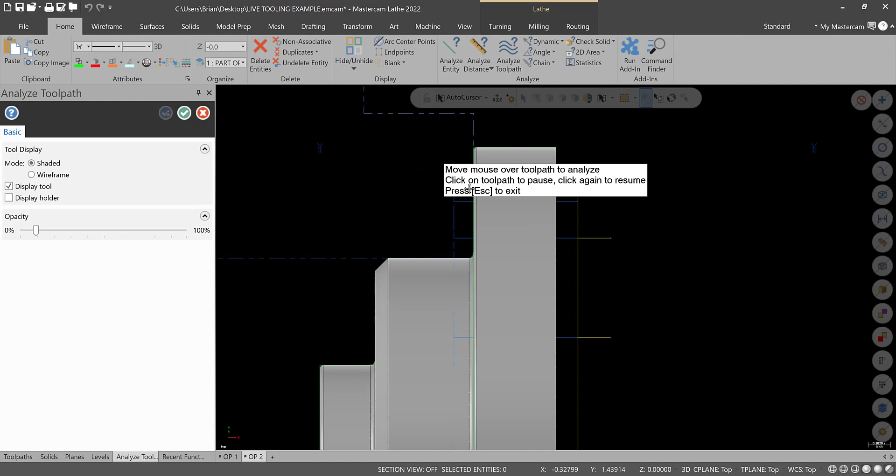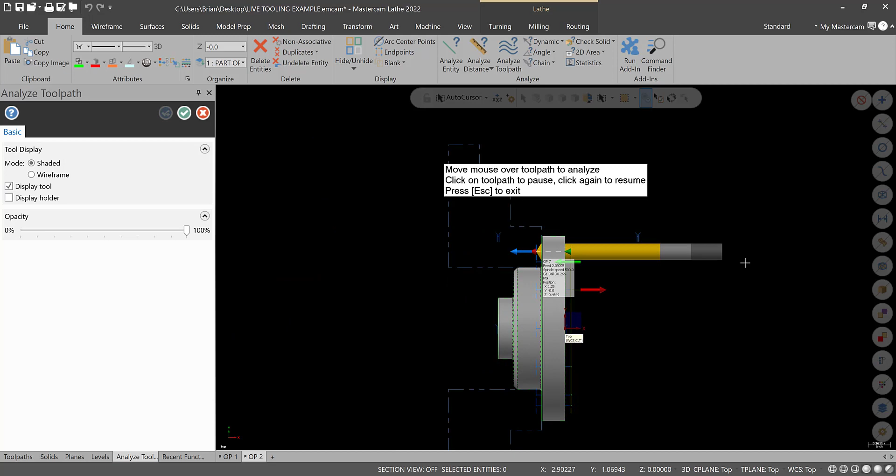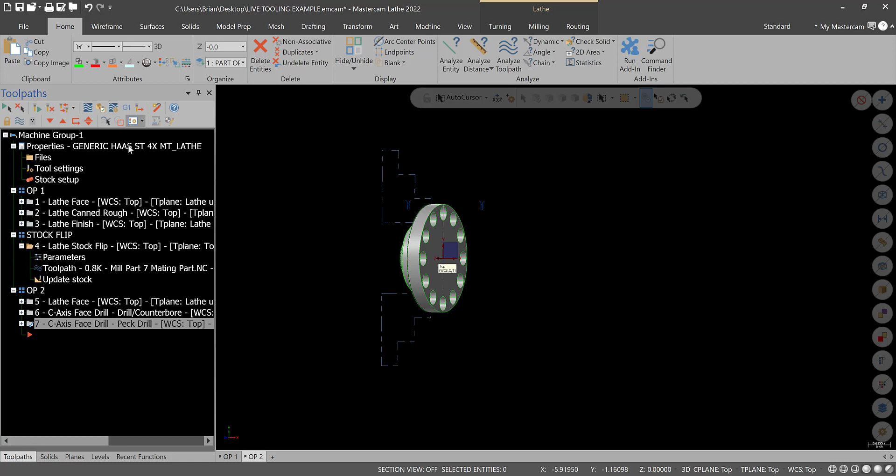So we're going to leave that alone. We'll accept the fact that we're going to hit the jaws for this op. And it is what it is. So we'll hit green check. And those jaws are aluminum, so we'll be fine. So there's the drilling. So I'll turn that one off. And now we can get into the milling operation. So I'll transition here quickly, and we'll come back and do the contour toolpath for all of these counterbores. Okay, so these counterbores look like a 400 thousandths diameter, so we'll end up using maybe like a 1/4 inch tool for that. So we'll get back into our turning example.

Okay, C axis, and I'm gonna end up going into face contour. All right, I will select all of these. Now notice that's the way we're going. That's going to be the wrong direction. So if you go this way, that's better. So we're climb cutting. If you plan a little bit with your curve selection, you can save yourself a little bit of time. You can always go back and fix it. Tool is going to be, let's say, a 1/4 inch end mill. So we'll get out of here, go to here, equal 0.25. There's a 1/4 inch end mill there. This will be tool 12.

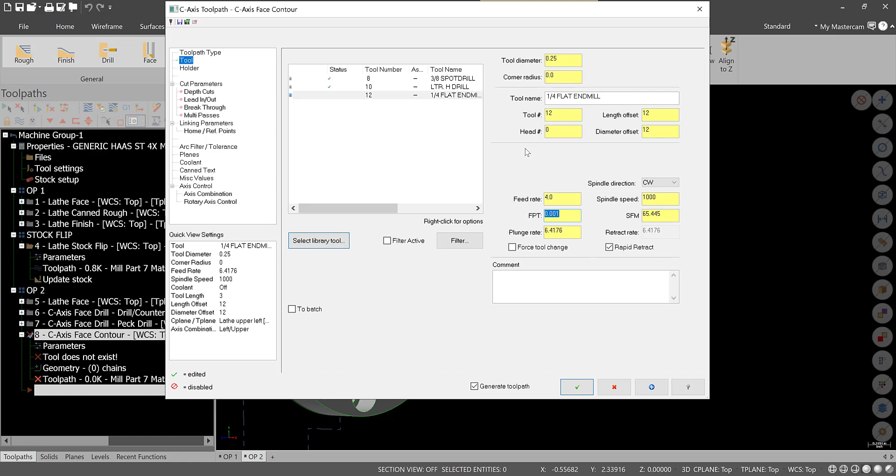All right. And we'll do a spindle speed. Let's just go 1,000 RPM, and let's do a chip load of 1/2 thou for now. Nice and easy. I mean, that's still slow. Let's just increase it. 1 thou is fine. Nice and easy on this one. Again, not optimal. I know I sound like a broken record, but somebody's going to leave a comment saying those speeds and feeds are out of whack. Well, again, I only have one machine to work with, and I got to get so many students through it. I'd rather have successful parts made and people learning how to use a machine than try to go fast, break the machine, and be down for a semester.

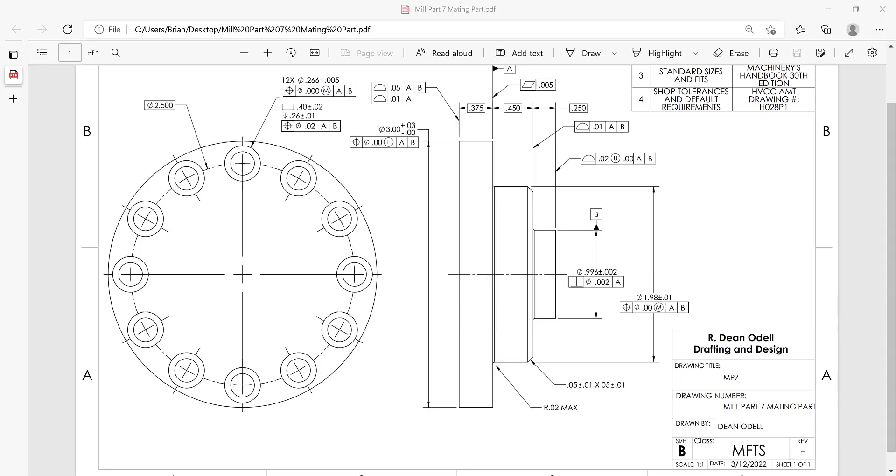So cut parameters, we're going to do a wear comp. We're just going to finish this out. Depth of cuts will end up going, let's say, 50 thousandths each time. Lead in, lead out. We're going to turn that off. And actually, being that the tolerance is wide open, plus or minus 20, just to keep this simple we're going to go to computer comp and not have any cutter compensation. We'll have no lead in, lead out. Breakthrough, don't care about. Multi-passes, not a big deal.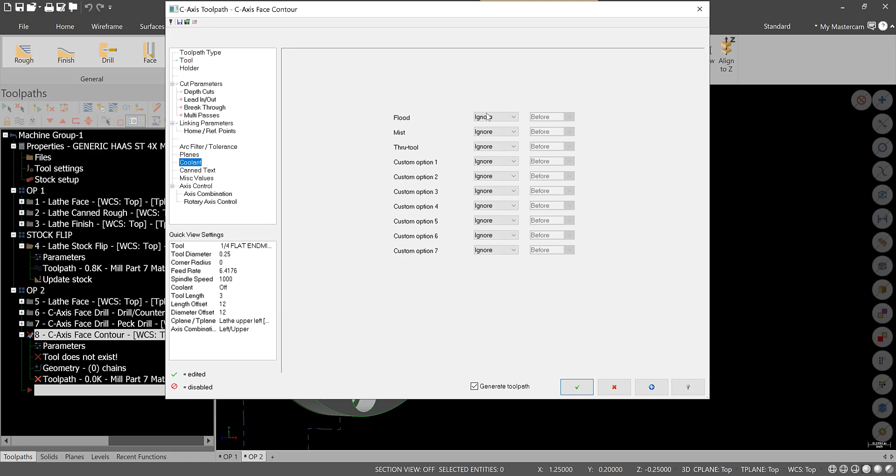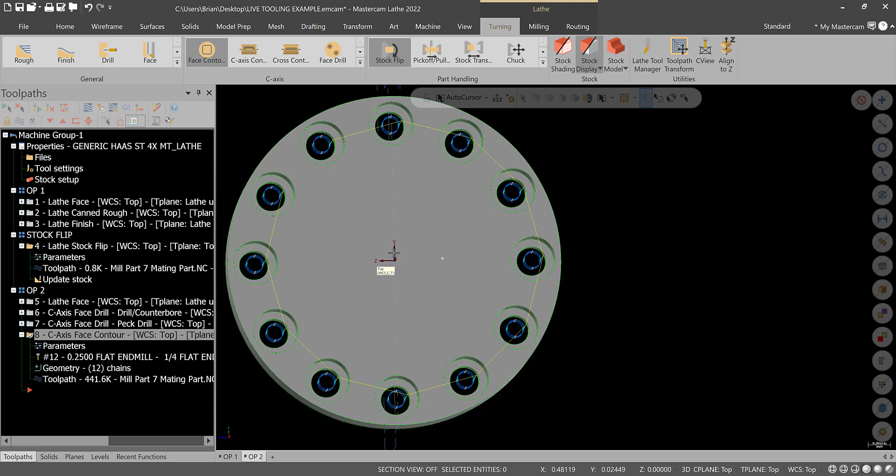Depth is going to be right there. Everything else should be okay. Arc filter we don't need. Planes are fine. Coolant should be on. And then our axis control, we'll do C-axis again, green check. Okay, so what's the problem? Why are the holes so big? Let's go to geometry, and notice they're on the wrong side. So what I'm going to do is select everything, and change side, and then hit green check. Regenerate the operation. Toolpath looks much better. Okay. So there's our op.

Alright, let's go to backplot and watch this run. Actually, I'm going to slow that down and just use the S button to go through. So it's going to go in, it's going to plunge 50 thou and cut around. Plunge 50 thou, cut around, plunge 50, and go on through. That should be okay. The only other option we have is to control our plunge points. Okay, so let me transition here, and we'll work through that. Alright, so I'm going to turn that toolpath off.

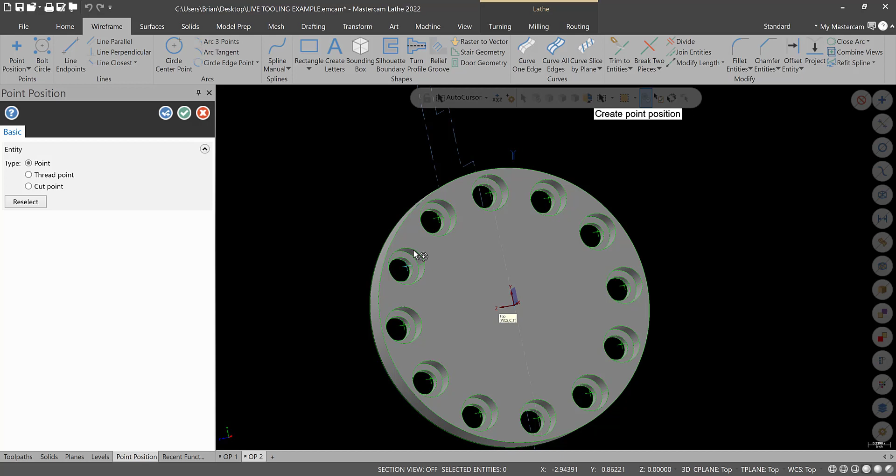And let's put some points in the center of all these. Okay, so go to point position, point. Put points in the center of every counterbore. And that point is going to be in our chaining to help define the start point. Because if we plunge in the center, the hole being 266, a 1/4 inch end mill will have no issues. It won't have to plunge. You can plunge almost as fast as you want it to because there's no material there.

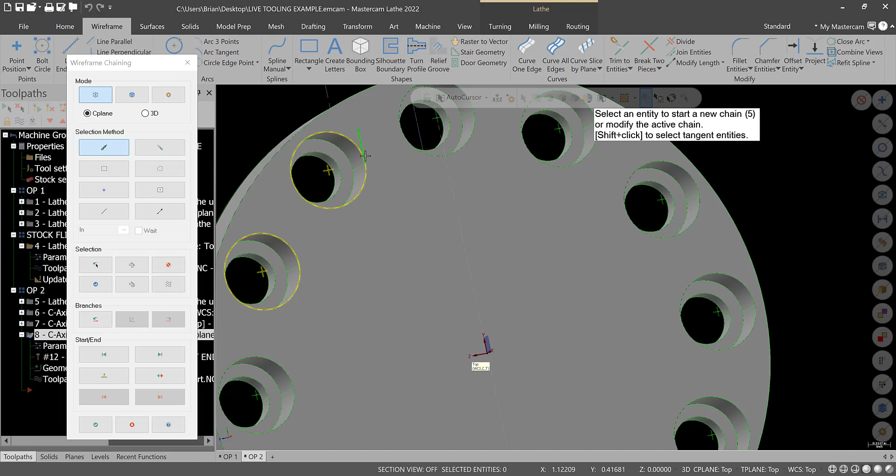So hit green check. And then we're going to rechain all. And then you're going to select, with the chaining option, select the point, select the arc. You can change direction. Hit apply. Point, arc. And you might be able to keep going, but I'm going to break them up. Apply. Point, arc. And just keep going. And again, careful selection of the points, because that is defining where the tool is going to plunge.

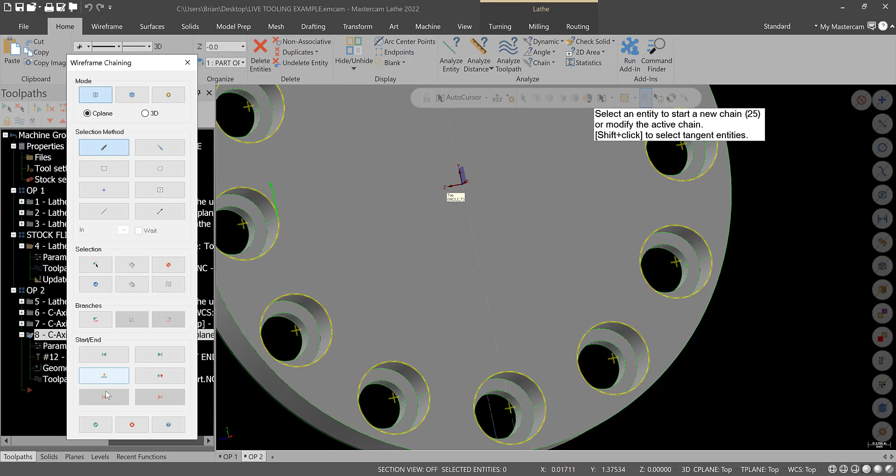And the way we do that is not only with chaining, giving it that point, but we will turn lead in and lead out on and select one of the parameters in there. So green check. Make sure the tool is on the right side. We look good. Green check. Go to parameters, and in lead in and lead out, make sure it's on. I changed the overlap up to 20 thou. I also, when I turn this on, make sure the length is 10%, arc is 10%, make sure it's small, and then make sure use entry point is on.

Make sure that's on. And now the other option you have is, because we're using lead in lead out, you can put wear comp back on. That's fine. You might get cutter comp interference depending on how much you're trying to compensate, but since we're moving 10 thousandths and we're using wear comp, we should be in good shape. If we hit green check and turn the toolpath on, you'll notice that the lead in lead out is coming right from center.

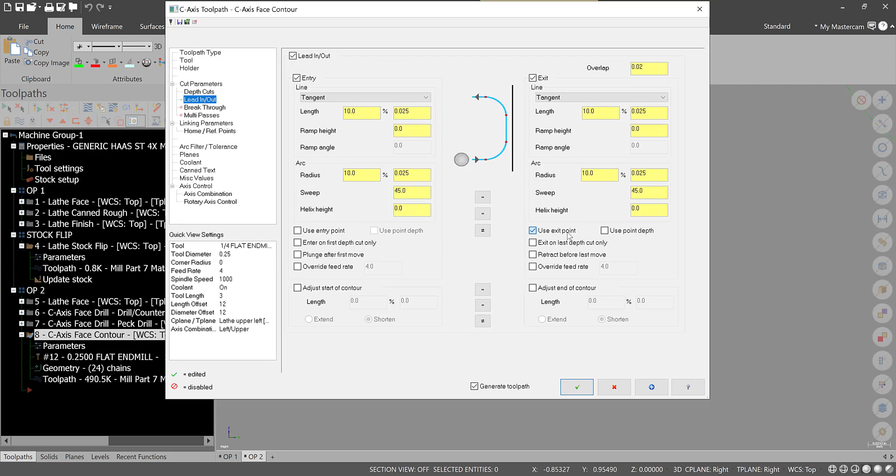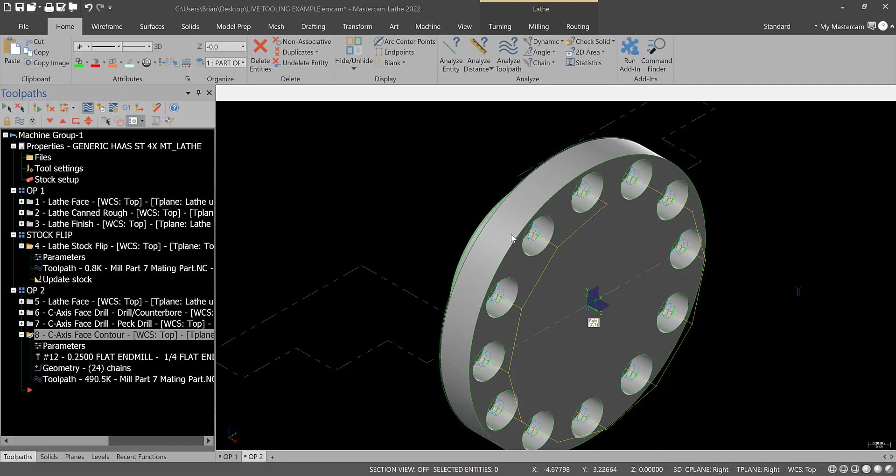Again, if you lose these and hit green check and regenerate, that's no good. We want to plunge at the center, and that's where this use entry point and the definition of the chain comes from. We gotta have the points in there. So there it is. Okay. So if we go to isometric and then watch this operation, not verify, I didn't mean to do that. If we just go to backplot and go to S, notice it's plunging right in the middle and working its way around each time.

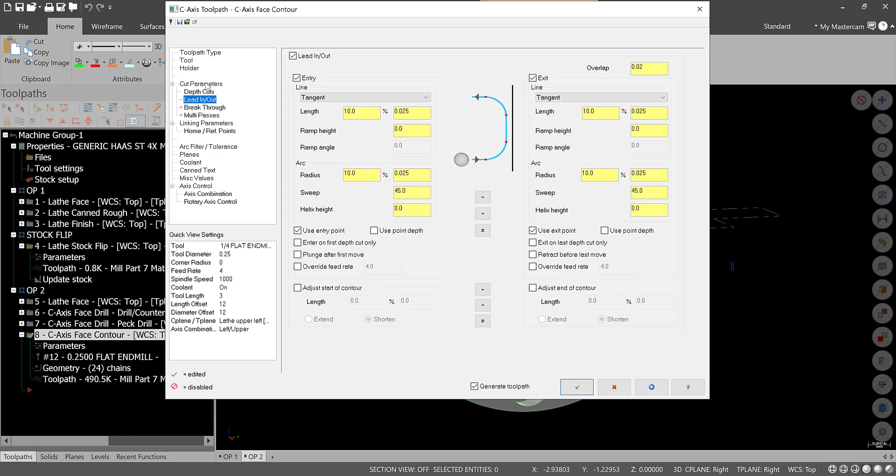Alright, and if I look at the times quickly, it's only 21 minutes for the cycle, so I'm not worried about the speeds and feeds. Again, they are very reduced. 50 thou depth of cuts is fine. Tool, yeah, slow. So we're good there. Okay, so we go to top view. Good time to save.

Select all of op 2, and let's get into backplot or verify. And we'll go like that, and hit play. Face it down. Spot drill. Drill. And then circle mill.

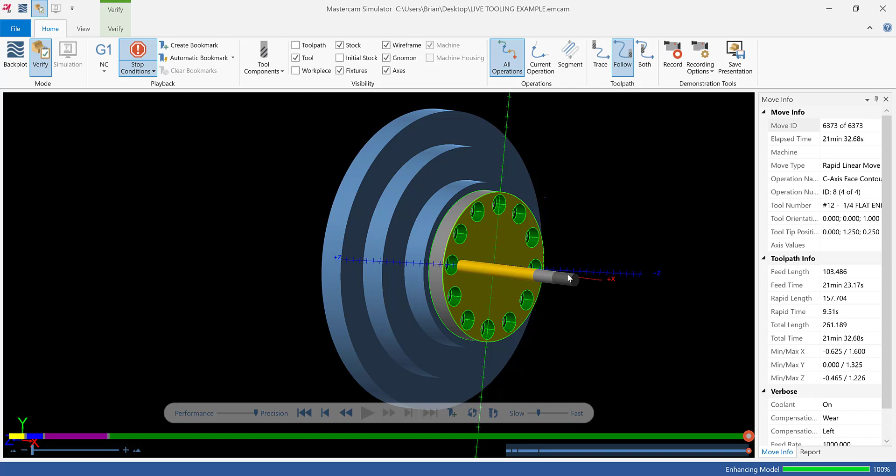Alright, so that part looks pretty much complete. We have the deburr. The only thing I wish we could deburr would be these two corners here. The reason I'm not going to do that is because this is not like a milling machine, at least our setup, where you can change tools in and out. We only have so many live axial holders, and we're already using 3. So there's going to be one for the spot drill, one for the drill, one for the end mill.

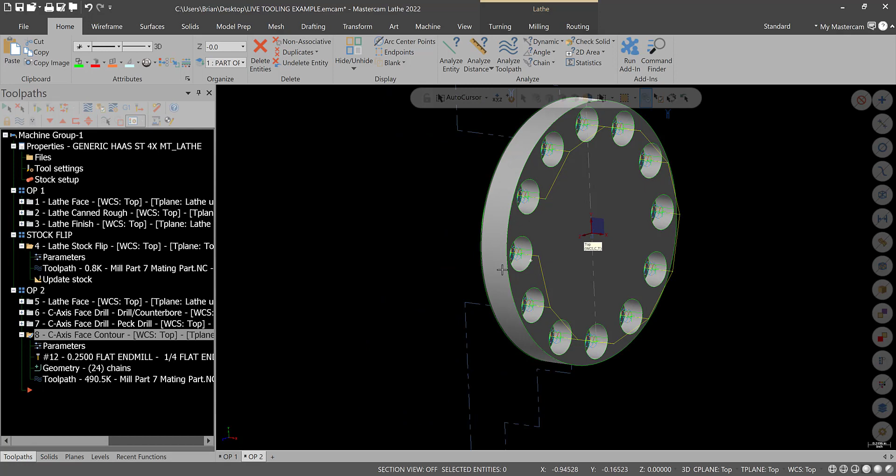Maybe if we use a carbide drill, we can get away with not having to spot drill, and you could use another tool, have another axial holder open. But a deburring toolpath here is not a big deal. If you get it, it would be the same idea, and then the cut parameters, 2D chamfer, just like you would on a milling machine. So that's it for this one. If I go to top view, save again, there's your op 2 toolpaths, and that's axial.

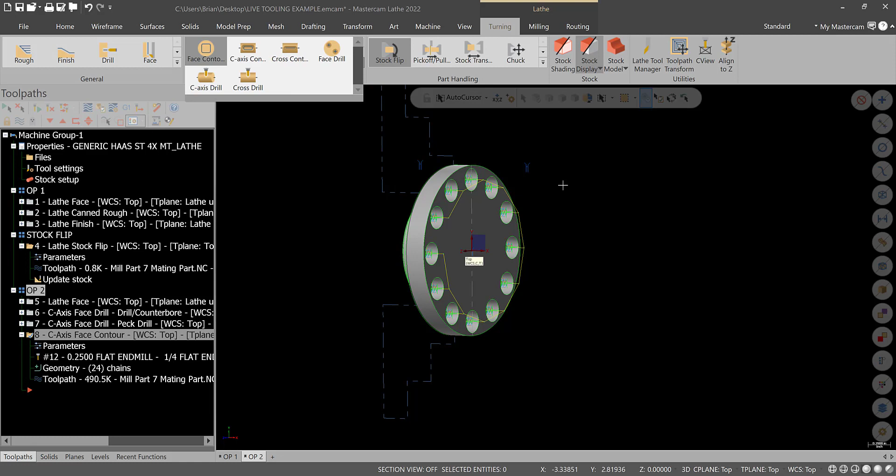Those are axial live tool or C-axis turning or Y turn, whatever you want to call it. Live tooling on the lathe. There's other options here. We used face contour, face drill for axial toolpaths. The one we did not play around with is going to be the radial tool, so the tool will be coming in perpendicular to the axis of rotation, and perhaps we'll get into that in a later module. But that's it for this one.